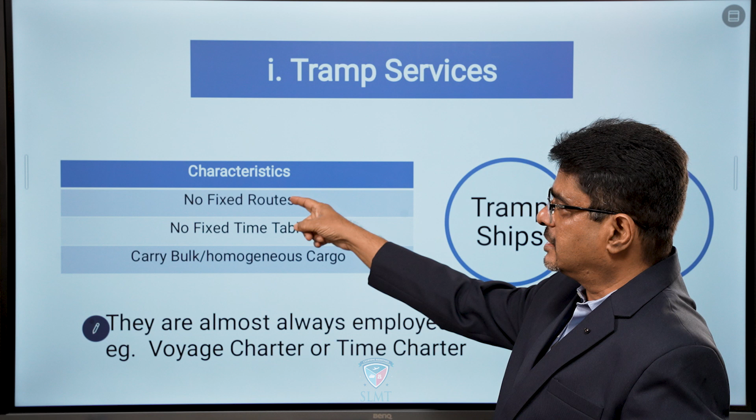Depending upon our requirement, we call the taxi. They come and pick you up and drop you to the place where you want to go. It's exactly like this the tramp services are. Tramp services come and load the cargo where it is required and discharge the cargo to the place where it is destined to. So these are the characteristics. There are no fixed routes, there are no fixed timetables, and they carry bulk or homogeneous cargo.

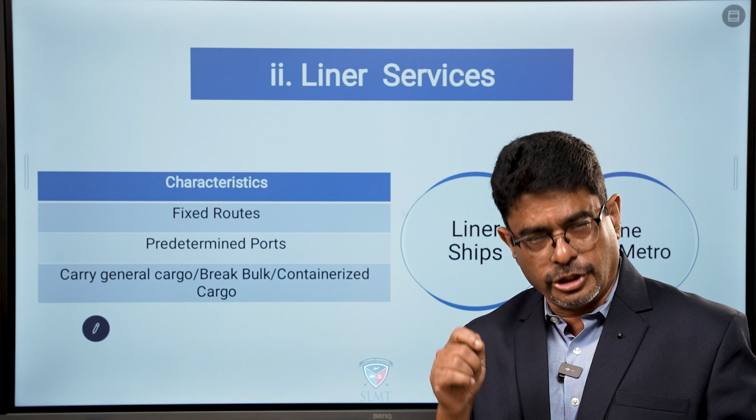Second is liner services. Liner services are shipping services where they have fixed routes, fixed timetables, and they carry general cargo and semi-finished and finished products. We can compare liner services with line bus or metro services. Line buses have fixed routes, they have fixed schedules, they have fixed bus stops, and there are fixed tariffs.

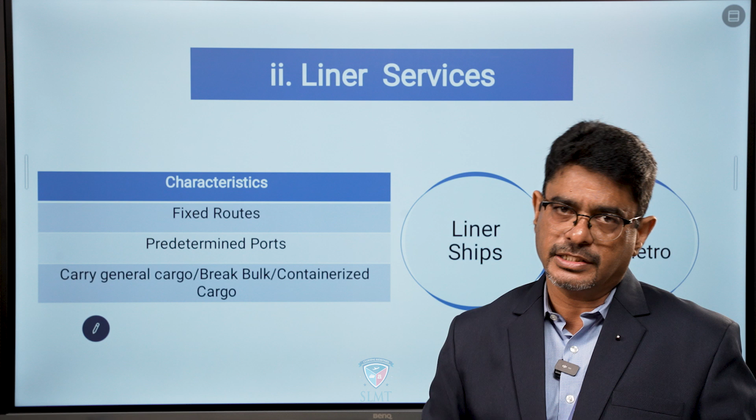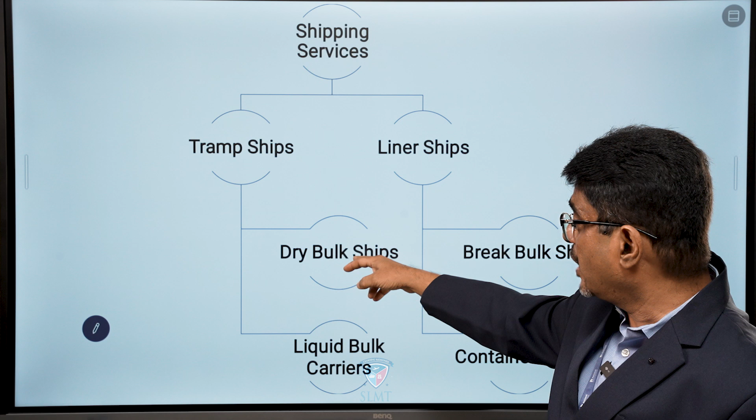So whoever wants to take a line bus, they have to come to that bus stop and utilize that service. This is exactly the same for liner services. Basically, containerized shipping comes under liner services. So, shipping services can be broadly classified into tramp services and liner services. Tramp ships can further be classified into dry bulk ships and liquid bulk ships. Liner ships can be further classified into break bulk ships and container ships.

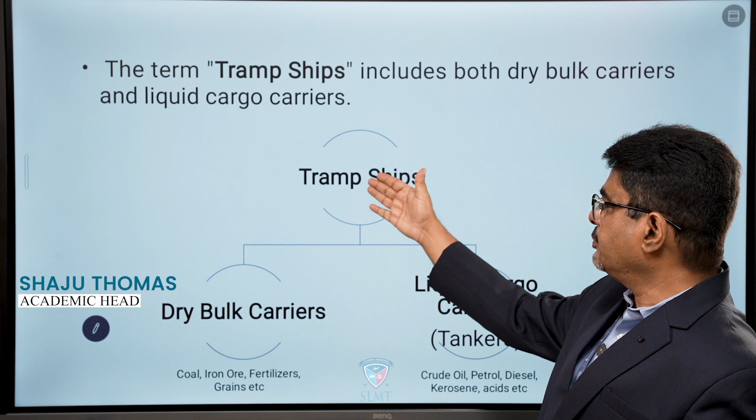So, tramp ships, as I've told, these are dry bulk carriers. Examples are bulk cargo like coal, iron ore, fertilizers, grains, sugar, cement. All these categories are loaded in bulk ships. They are loaded in bulk. They are loose cargo, homogeneous cargo. Most of the raw materials are carried in dry bulk carriers.

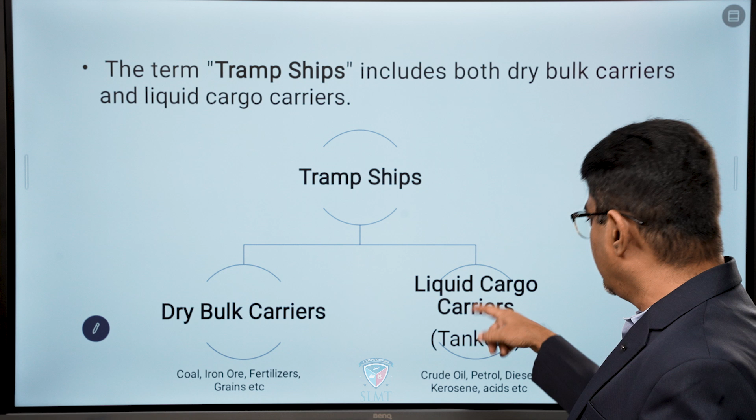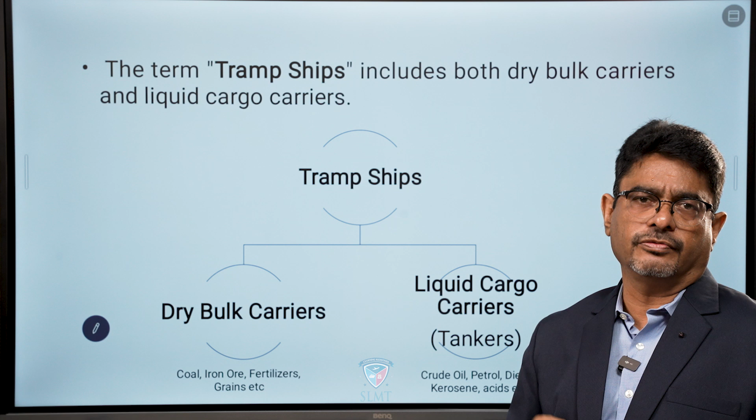The second category is liquid cargo carriers. They are tankers. All sorts of liquid cargo like crude oil, petrol, diesel, kerosene, and other sorts of liquid cargos are carried in liquid cargo carriers.

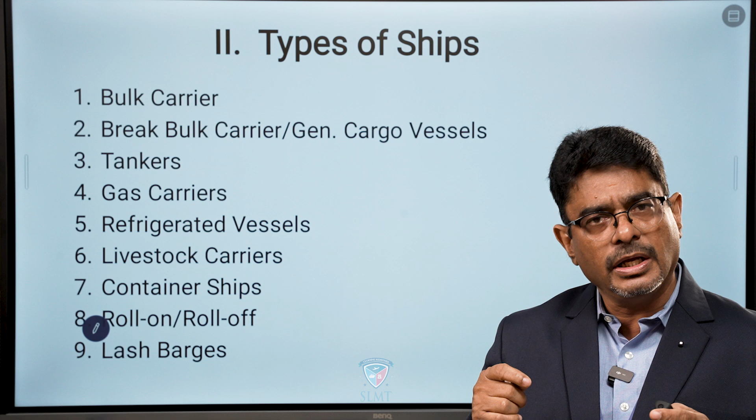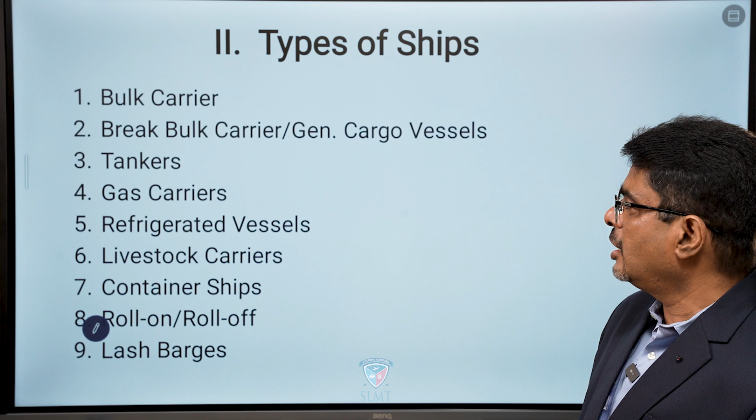So now we'll go to the types of ships. There are different types of ships available depending upon the types of cargo that is to be carried. So there are bulk carriers, break bulk carriers or general cargo vessels, tankers, gas carriers, refrigerated ships, livestock carriers, container ships, roll-on roll-off ships, lash barges, etc. So we'll come to the first category of ship, that is the dry bulk ships.

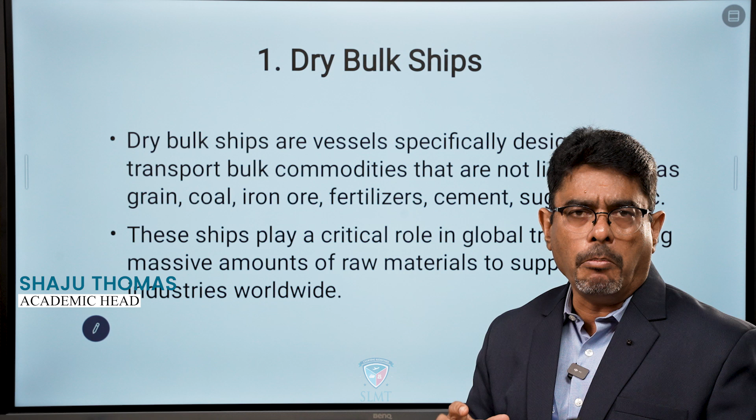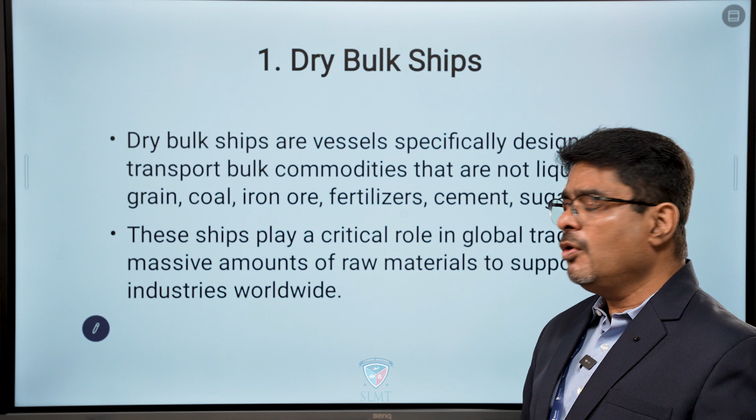Dry bulk ships are designed to carry bulk cargoes. As I've told you, coal, iron ore, grains, fertilizers, cement, sugar, salt, all these sorts of cargoes are loaded in bulk ships. These ships play a critical role in global trade, carrying massive amounts of raw material to support industries worldwide. So most of these bulk carriers carry raw materials, which are an integral part of the industry.

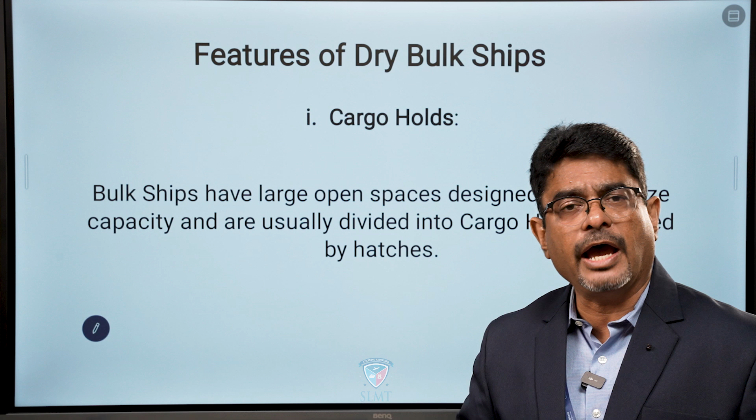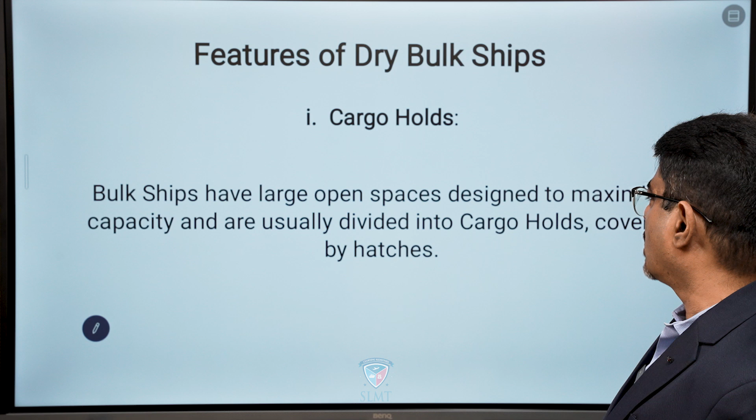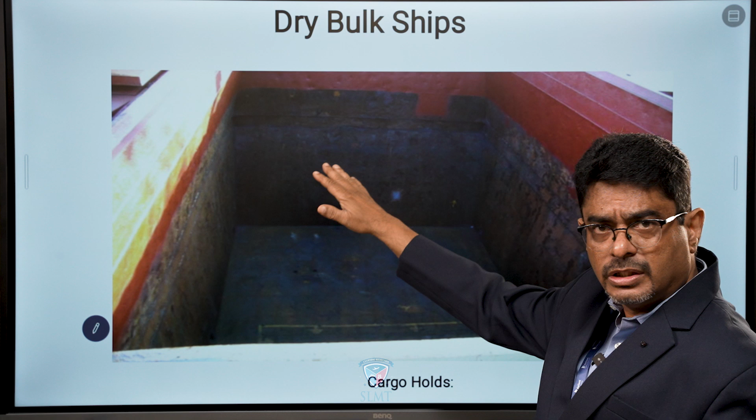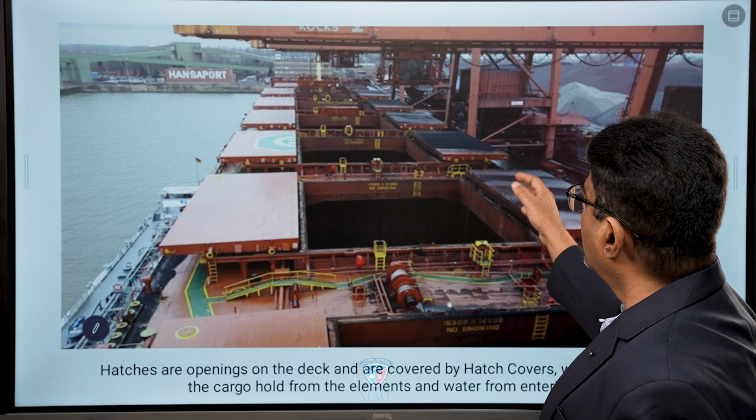Okay, so this is the picture of a ship. This is the cargo hold, and these are hatch covers. Okay, so hatches are openings on the deck and are covered by hatch covers, which protect the cargo hold from the elements and water from entering.

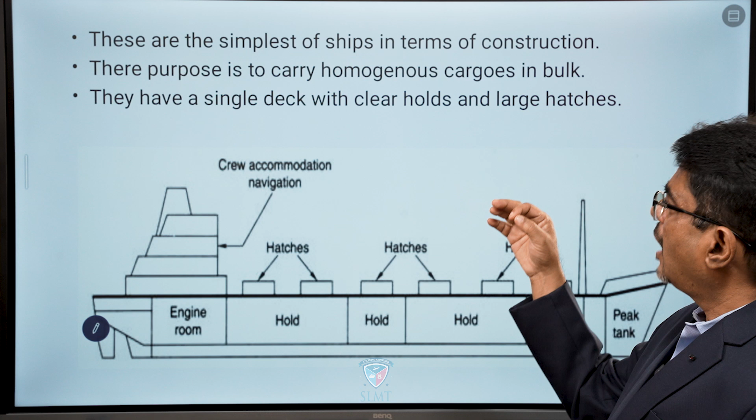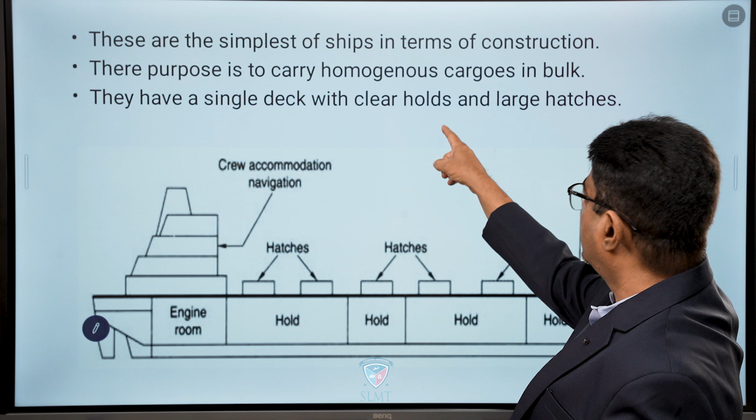This is a picture of a ship. These are the holds. Okay, there are 1, 2, 3, 4 holds where the cargo is stored. These are the hatches, and these are the hatch covers. Okay, so bulk ships are the simplest of ships in terms of construction. Their purpose is to carry homogeneous cargo in bulk, and they have a single deck with clear holds and large hatches.

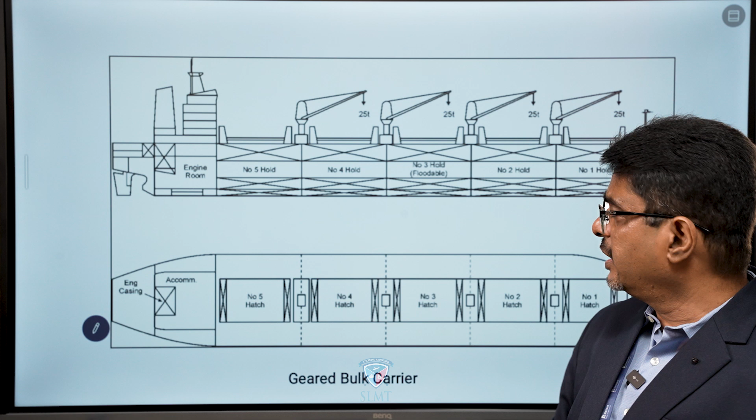That is, once the cargo discharge is completed, the ship should be ready for the next employment. That may be a different type of cargo. So the previous cargo needs to be completely cleaned. All the residues need to be cleaned so that the ship is ready to carry the cargo for the next employment.

Now the second feature is the loading and unloading. Okay, normally smaller ships have cranes to load and unload the cargo. Okay, so small ships often have onboard cranes fitted with grabs, spouts, or conveyors. Large vessels rely on specialized port equipment.

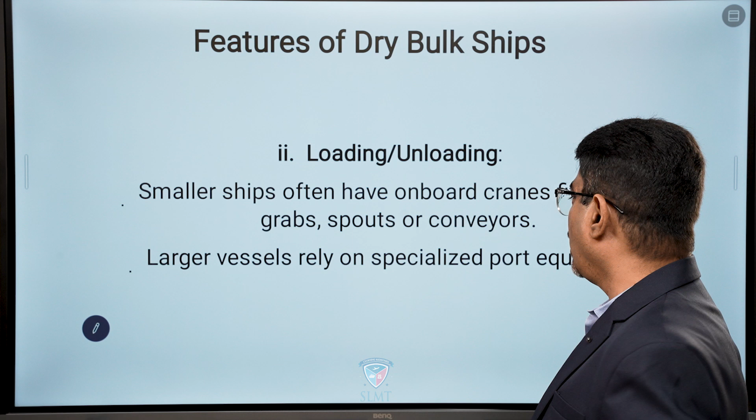Okay, so most of the small bulk carriers have cranes fitted with grabs or spouts or conveyors for loading and unloading the cargo. Larger vessels normally utilize shore equipment to handle the cargo. So this is a picture of a bulk ship. This is a geared vessel. Geared vessels are vessels having cranes to load and unload the cargo.

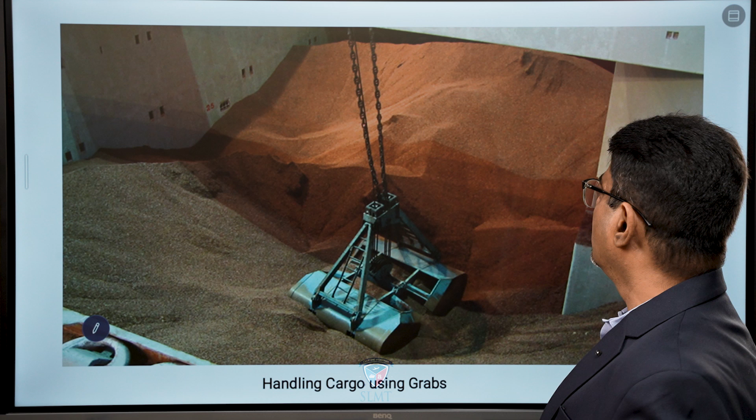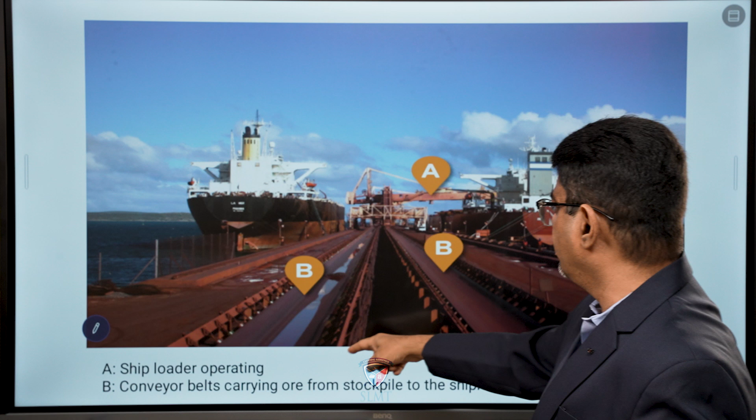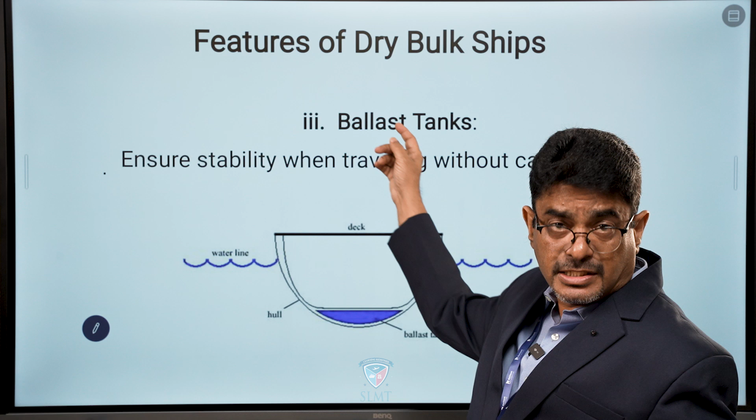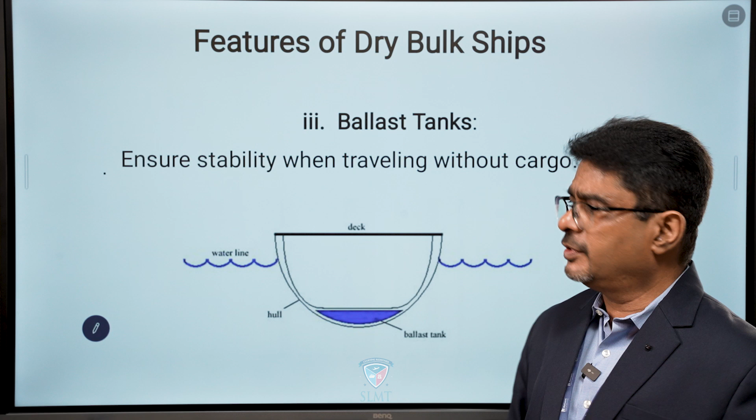So the third feature is the ballast tanks. Okay, ballast tanks ensure stability when the ship moves empty. When there is no cargo available, they have to fill the ballast tanks with water to ensure the stability of the ship.

Now, bulk carrier ships can be further subdivided into various classifications depending upon the size of the ship. Okay? So the smallest of the ships are coaster bulk carriers. Then we have handy-sized bulk carriers, handy-max bulk carriers, Panamax bulk carriers, Cape-size bulk carriers, very large ore carriers, ultra-large ore carriers, and China-max ships. Okay? So depending upon the deadweight of the ship, that is the capacity, the ships are categorized into 8. We'll just go through these one by one.

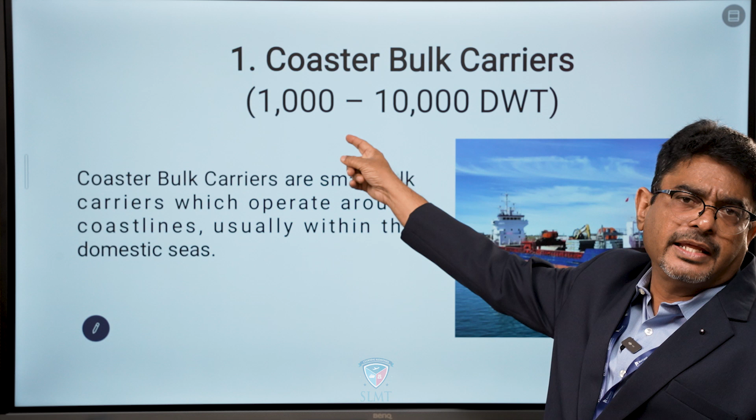What are coaster bulk carriers? Coaster bulk carriers are small ships having a capacity of 1,000 to 10,000 deadweight tonnage. That means coaster bulk carriers are small bulk carriers which operate around coastlines, usually within the domestic seas.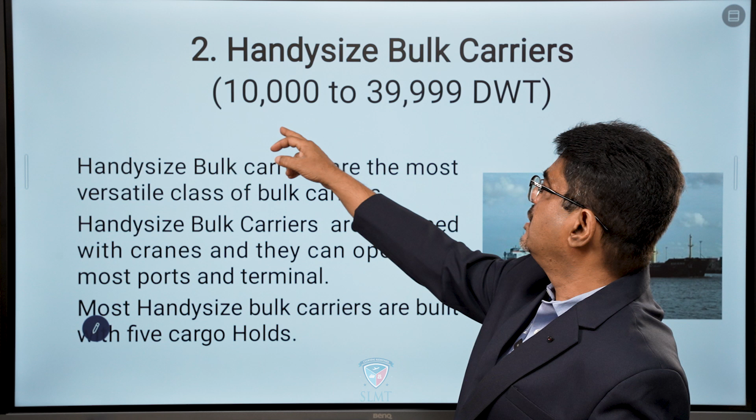Handy-sized bulk ships are a little bigger. Their sizes vary from 10,000 to 40,000 deadweight tonnage. Okay, so they are the most versatile class of bulk carriers. Handy-sized bulk carriers are equipped with cranes and they can operate in most ports and terminals. Most handy-sized bulk carriers are built with 5 cargo holds. So there will normally be 5 cargo holds to store the cargo.

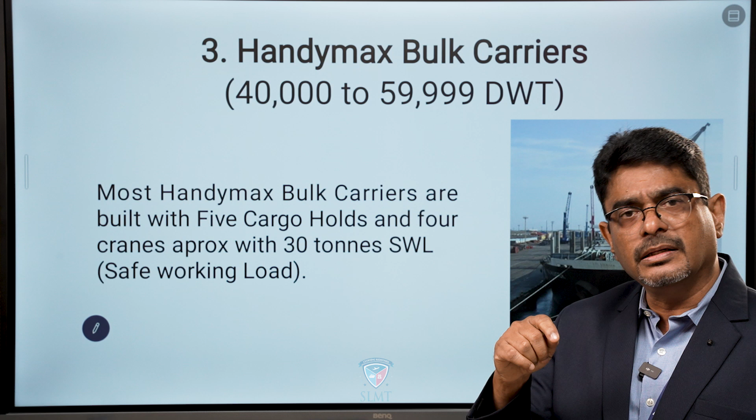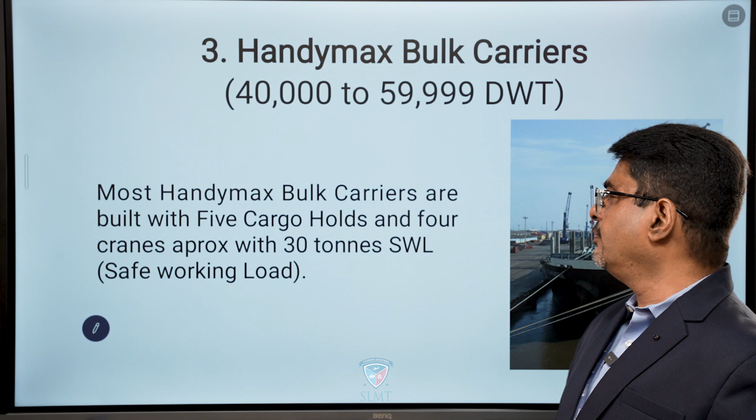Now the third category is handy-max bulk carriers. Handy-max bulk carriers are even larger than handy-size. Okay, they are ships having a capacity of 40,000 to 60,000 deadweight tonnage. Most handy-max bulk carriers are built with 5 cargo holds and 4 cranes of approximately 30 tons safe working load.

Now the fourth one are Panamax bulk carriers. Panamax bulk carriers are ships with sizes between 60,000 and 1 lakh deadweight tonnage. Okay. These ships are medium-sized ships and the largest size of ships that are able to pass through the Panama Canal. Okay. The ships are designed in such a way that they can cross through the Panama Canal without any problem.

The next category of ships are Cape-size ships. Cape-size ships are ships having a capacity of 1 lakh to 2 lakh deadweight capacity. These ships are big and they won't be able to pass through the Panama Canal or Suez Canal. They have to cross through Cape Horn or the Cape of Good Hope. They predominantly carry iron ore and coal. There is a relatively small number of ports with the infrastructure to accommodate Cape-size ships.

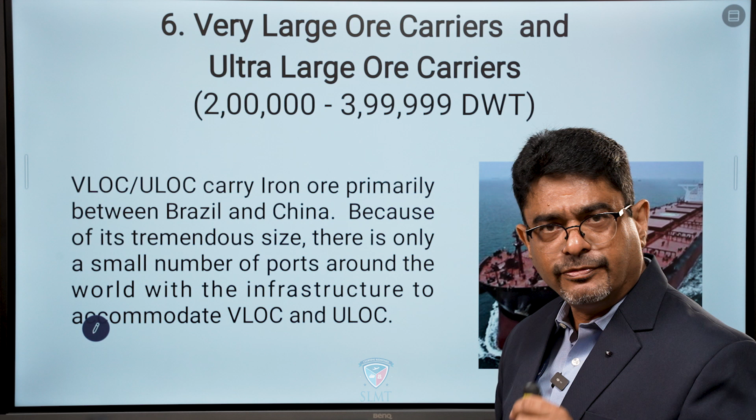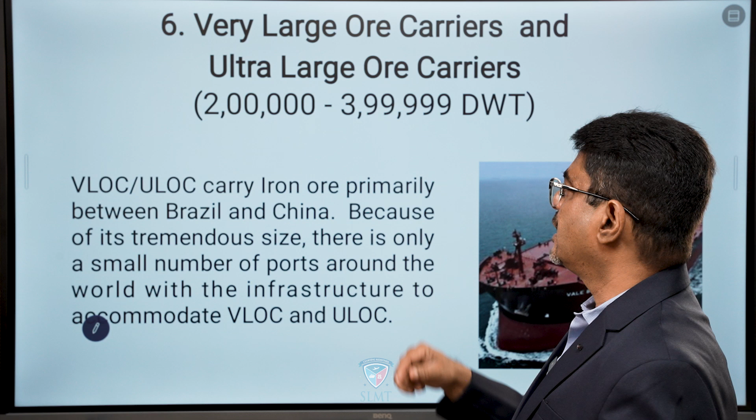Then we'll come to the very large ore carriers. Very large ore carriers are ships having capacity of 2 lakh to 4 lakh deadweight tonnage. These ships are huge and they basically carry iron ore primarily between Brazil and China. Because of their tremendous size, there is only a small number of ports that have the capability to accommodate these big ships. Very large ore carriers and ultra large ore carriers come under this category, that is, ships having a capacity of 2 lakh to 4 lakh deadweight tonnage.

And we come to the final category of ships. They are called Chinamax ships. Chinamax ships are very large ore carriers, and these ships are used basically to carry iron ore from Brazil into China. That's why they named these ships Chinamax. These are ships having a deadweight capacity of above 4 lakh deadweight tonnage.

So what is the economic importance of dry bulk ships? The dry bulk shipping industry is closely related to the economic condition of the globe. It all depends upon global economic conditions. If the global demand for cargo is high, naturally there will be demand for dry bulk ships. If there is less demand, then it indirectly affects the dry bulk shipping industry. The Baltic Dry Index is the key economic indicator that reflects the health of the dry bulk market. Every day this Baltic Dry Index varies depending upon the market conditions.

So we will summarize what we studied today. We learned about the types of ships, and we specifically understood dry bulk ships. Before that, we learned about the different types of services available. Shipping services can be broadly classified into tramp services and liner services. Tramp services don't have any fixed schedules or routes. You can compare tramp services to taxi services. When you want to go from one place to another, you book a taxi or an Uber. The car picks you up and drops you where you need to go. Tramp services work exactly this way. Wherever the cargo is available, they pick it up and discharge it where it is needed. Most of these ships carry bulk cargo like iron ore, coal, cement, fertilizers, grains, salt, etc.

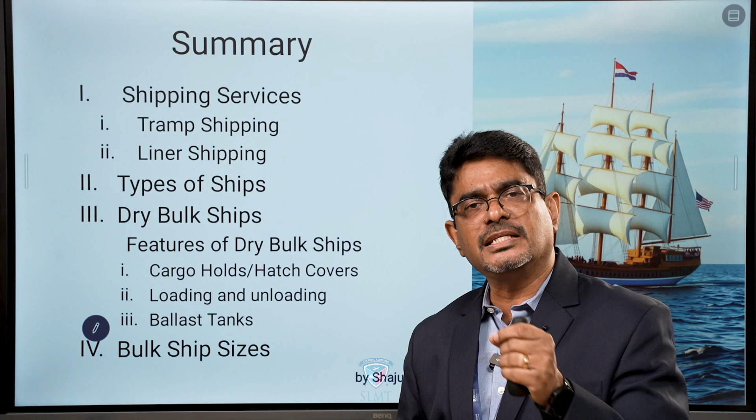The next category of services is liner shipping. Liner shipping has a specific schedule and fixed routes. The ships have to go through these fixed ports according to the timetable. Container ships belong to liner services. Then we studied the different types of ships, out of which we went into detail on dry bulk ships. The features of dry bulk ships are they have cargo holds, single deck, and they carry homogeneous, loose, unpacked cargo, for example coal, salt, fertilizers, iron ore. Basically, dry bulk ships carry raw materials, and cargo is loaded using cranes fitted with grabs or spouts, or with conveyor belts. And they have ballast tanks. When the ship sails empty, they fill it with water to ensure the stability of the ship.

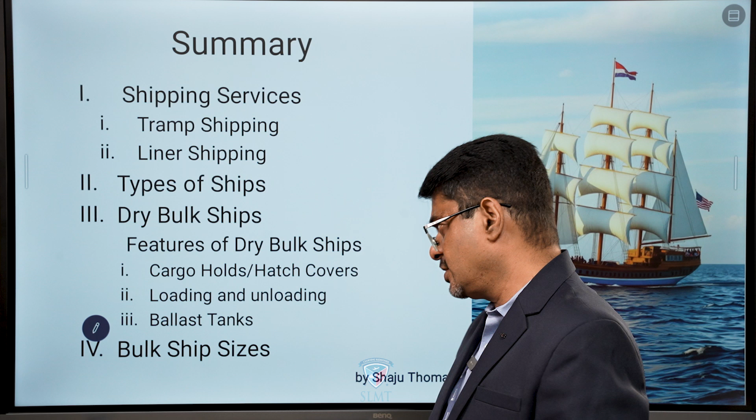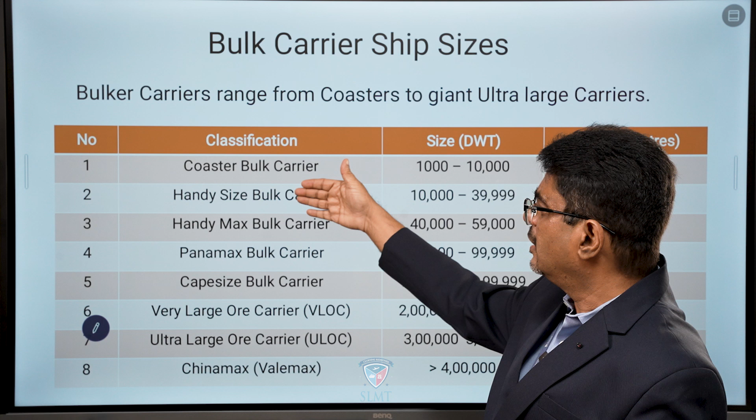We also studied bulk ship sizes. Bulk ship sizes are of 8 categories, categorized according to the deadweight tonnage of the ships. Smaller ships are called coaster bulk carriers. Depending upon the size of the ships, we name them separately. Ships having a capacity of above 4 lakh deadweight tonnage are called Chinamax ships.